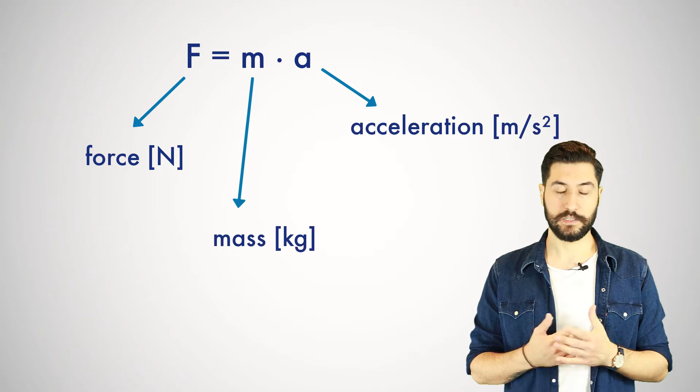A good guide value is, for example, a well-trained construction worker with a weight of 100 kilograms, who causes a force of 1 kilonewton due to the acceleration of gravity. We engineers consider forces to be somewhat simplified because our calculations are usually idealized.

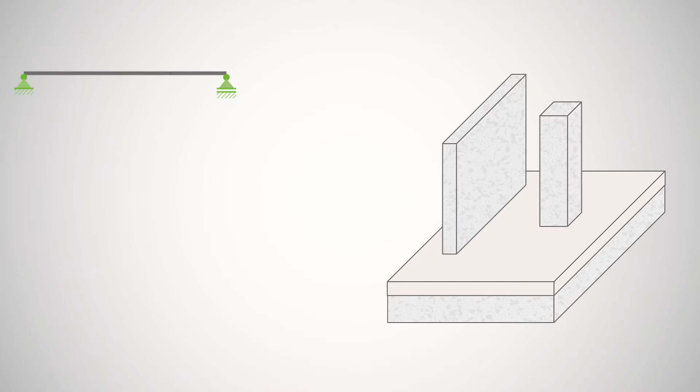Forces that act permanently or only sometimes on a structure, such as the self-weight of the structure, wind, snow, or even vehicles are called loads. We can divide these into the following types, depending on the target surface. Single loads. These are forces applied at specific points by an arrow indicating the direction and the point of application, such as the load transfer of a column to a foundation.

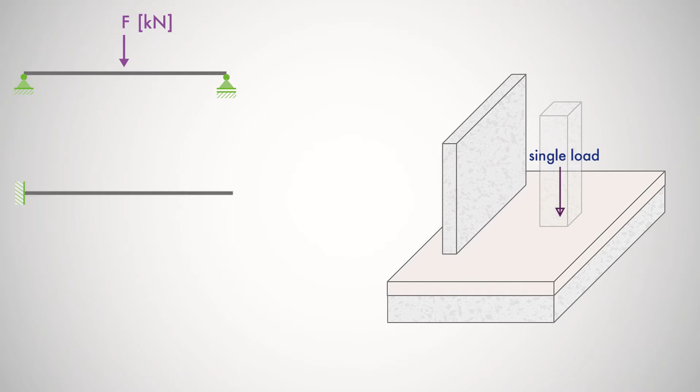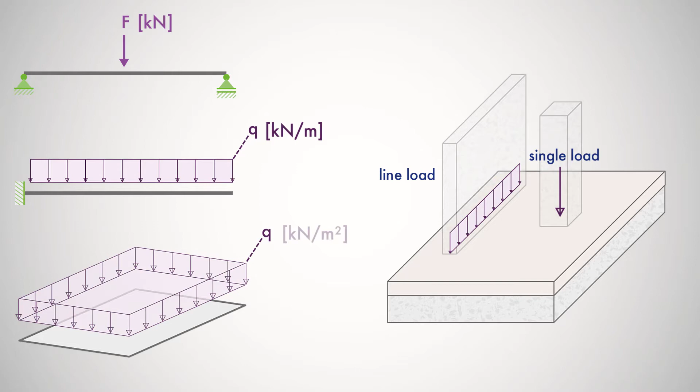Line loads. These are forces distributed over a certain length indicated by a series of arrows, such as non-load-bearing walls. And forces distributed over a certain surface are symbolized by a surface of arrows, such as the floor structure of a floor slab. These are called surface loads.

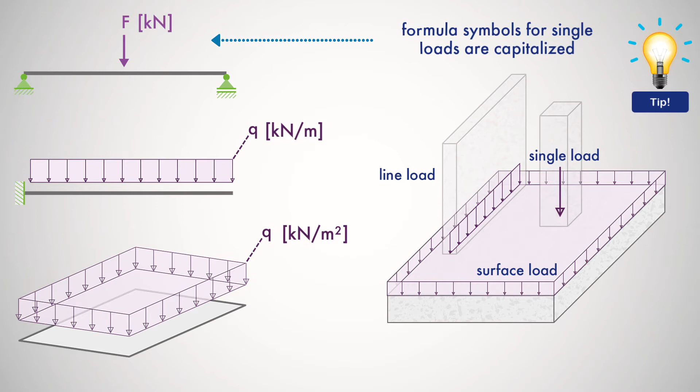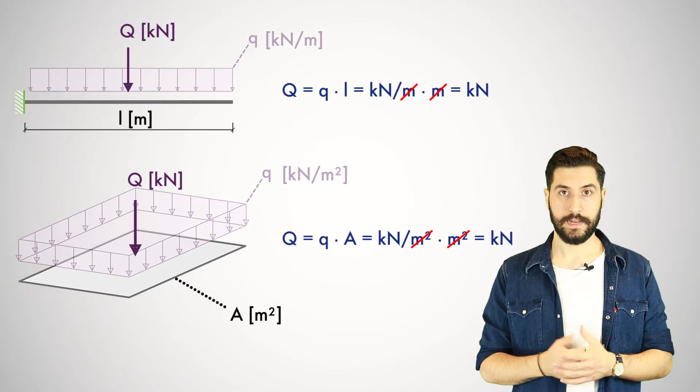You can find the resulting concentrated load from line loads and surface loads by multiplying it by the respective length or area. However, there are not only constant line or surface loads. Trapezoidal or triangular loads are also very common in structural design. For example, by the load distribution of a floor.

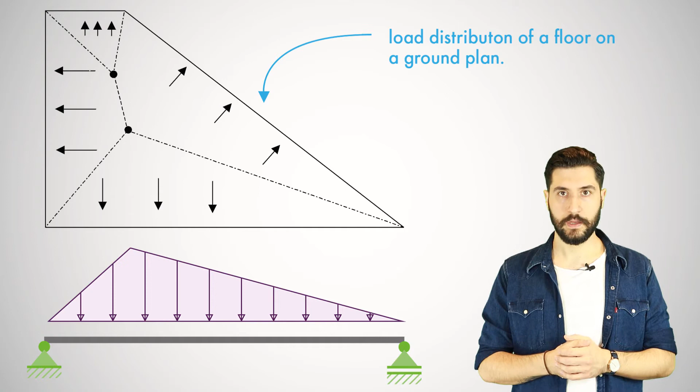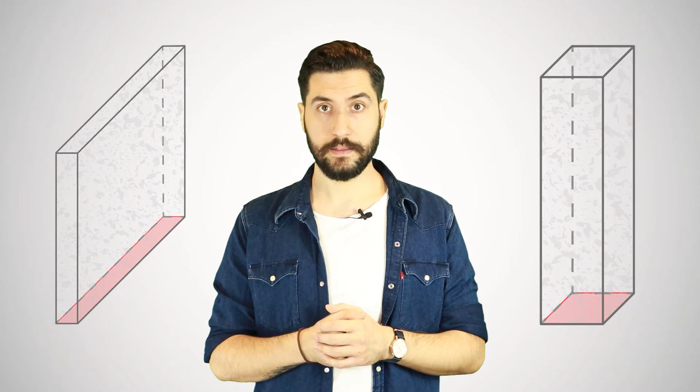Point loads and line loads do not really exist, because all structural components or bodies have an action surface, albeit a very small one. Simplifying and on the safe side, we do not consider them as surface loads, but idealize them. In the practical implementation in the structural analysis software RFEM, it looks something like this.

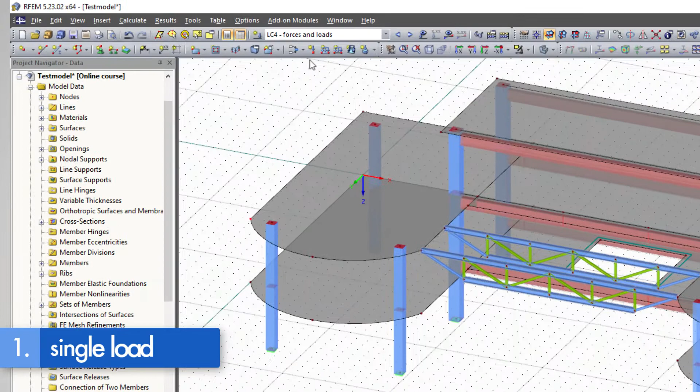First, we select the desired load case in which we want to enter our loads. A single load corresponds to a nodal load in RFEM, so we simply click the node where we want to apply the load. Then we select New Nodal Load and enter our load parameters.

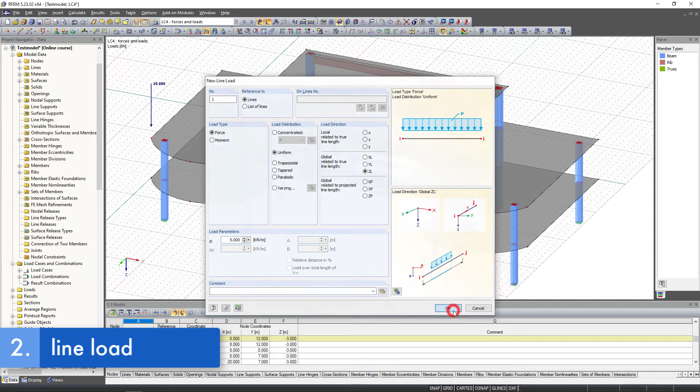To enter a line load, we have to differentiate between line loads and member loads in RFEM. If we want to apply the load to a surface that is surrounded by lines or on which lines are located, we use line loads. For beam structures, we use member loads instead of line loads.

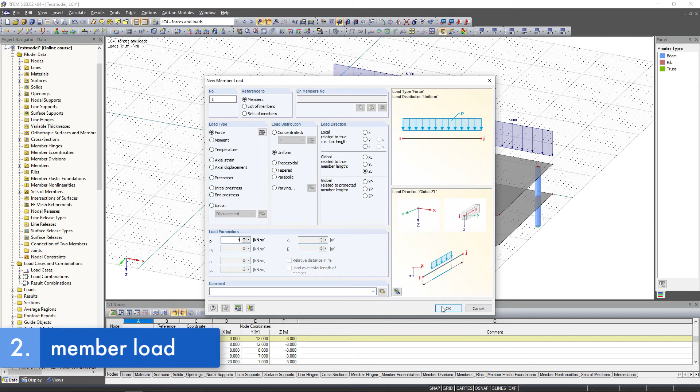Finally, we enter a surface load. To do this, we click New Surface Load, enter our load size, and select our desired surface.